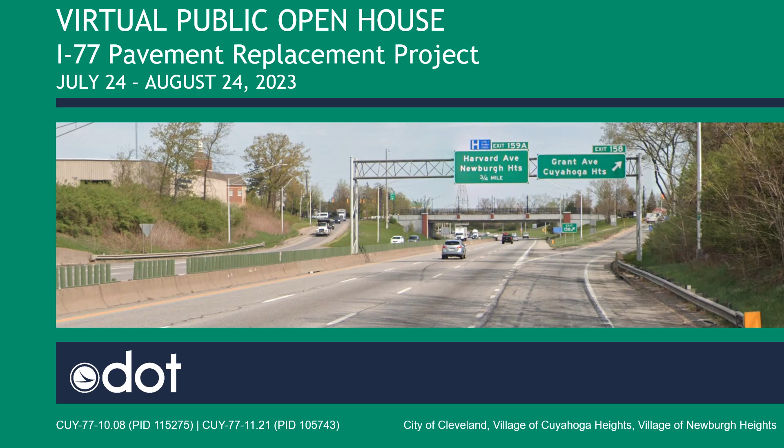Your feedback is encouraged. You're invited to review the information on this website to find out more about what is included in the I-77 pavement replacement project, the impacts it will have on the human and natural environment, and how and when it will be built.

We ask that you give us your feedback by August 24th, 2023. Comments received by this date will be formally documented and considered during the project's final design and construction phases. Responses to all the comments received will also be posted to the website after the virtual open house is over.

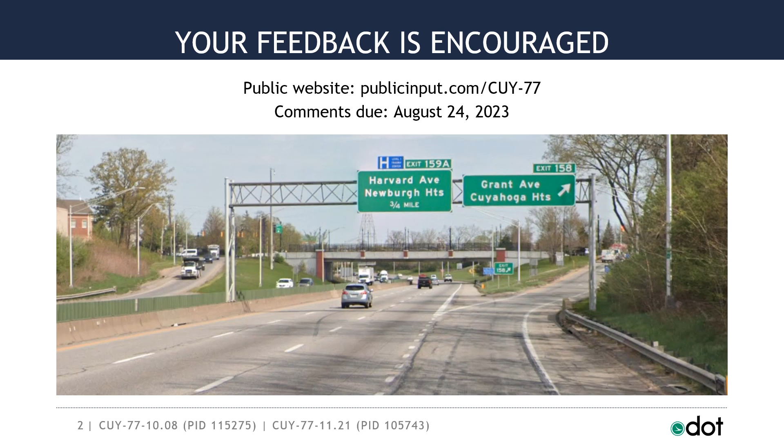The agenda. This presentation will include general information about the I-77 pavement replacement project, including why it is being built and what improvements will be made. We'll also provide an overview of how traffic will be maintained during construction and what detours you can expect while the project is being built.

In addition, we'll provide information about how ODOT is planning to address impacts to the CHARD Avenue pedestrian bridge. Information about expected environmental and property impacts, also known as right-of-way acquisition, will also be presented. We will conclude by going over the project's next steps and sharing ways that you can provide feedback about this project.

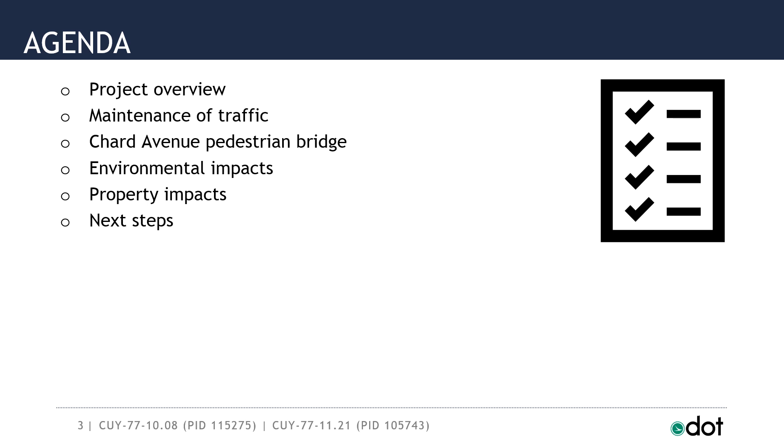Project overview. The I-77 pavement replacement project is located in Cuyahoga County and will stretch from the Canal Road overpass in the south to I-490 in the north. This 5-year project will be built in 2 different sections. The first section will take place from south of Fleet Avenue to I-490 in the city of Cleveland and the village of Newburgh Heights. The second section will take place from Canal Road overpass to south of Fleet Avenue in the villages of Cuyahoga Heights and Newburgh Heights.

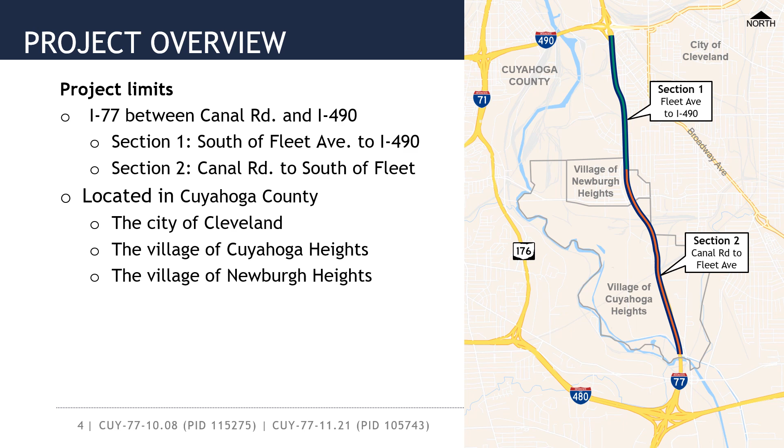The narrow median shoulders on I-77 restrict access for emergency vehicles and do not provide enough room for disabled vehicles to pull out of traffic. The narrow median shoulders limit the ability to contain water during rainstorms. Furthermore, the highway drainage system is over 60 years old and the pipes are in poor condition. The primary needs of this project include improving the drainage system and bringing the roadway up to current design standards.

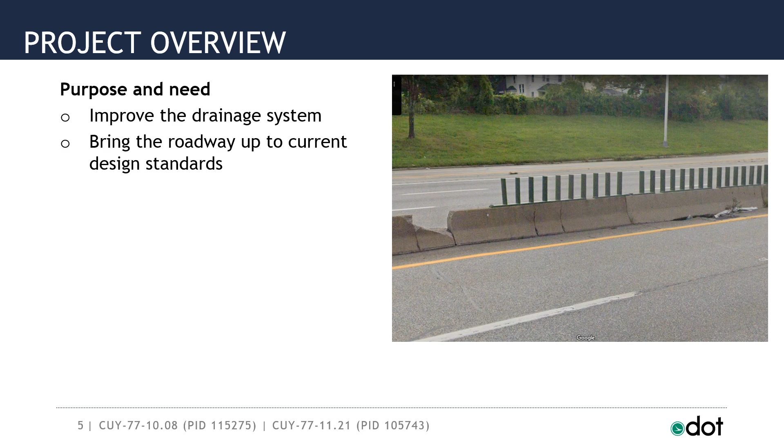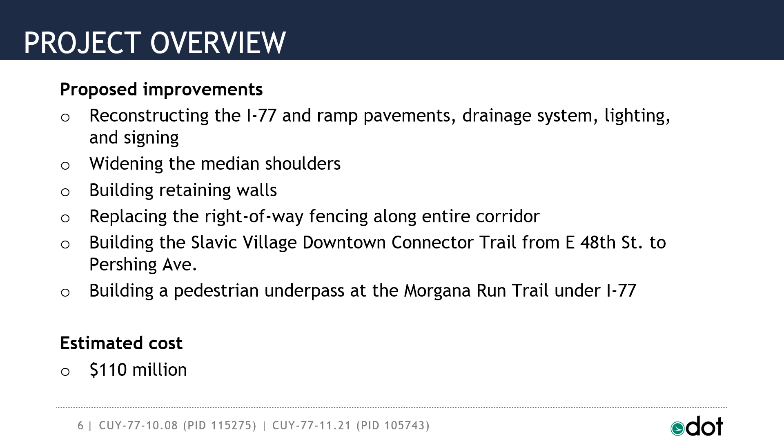The project is currently estimated to cost about $110 million and will be constructed over a 5-year period. It will include the following improvements: reconstructing the I-77 and ramp pavements, drainage systems, lighting and signing, widening the median shoulders, building retaining walls, replacing the right-of-way fencing along the entire corridor, building the Slavic Village downtown connector trail from East 48th Street to Pershing Avenue, and building a pedestrian underpass at the Morgana Run Trail under I-77.

These graphics compare what I-77 looks like today and what it will look like after the project is built. The project will not add any new lanes on I-77. When the project is done, there will still be 3 lanes in each direction on I-77. However, the median shoulders will be widened. Today, the median shoulders are only about 3 feet wide. When the project is completed, they will be 10 feet wide. This will improve safety in the corridor and will help keep traffic moving by providing additional areas for disabled vehicles to pull off the highway.

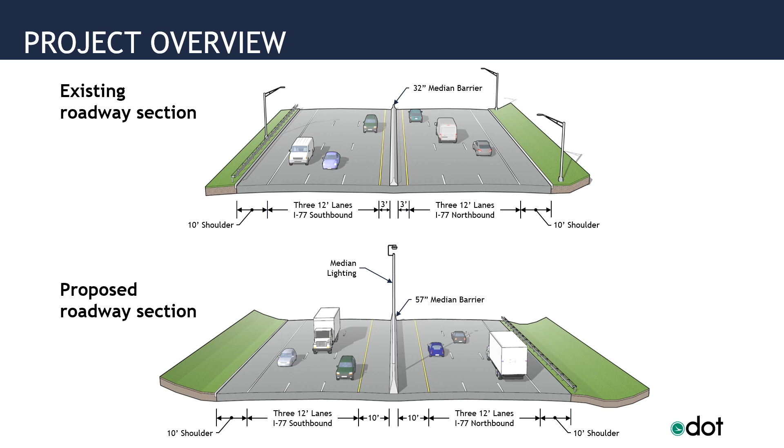As part of the project, the I-77 pavement will be completely removed and rebuilt. The highway drainage system will also be replaced, including increasing the size of the storm sewer pipes from 42 inches to 72 inches to capture water during rainstorms. The median barrier will also be completely replaced, and the new barrier will be 2 feet taller than the one that exists today. Finally, the lighting will be completely replaced. Today there are light poles on both sides of I-77. The project will include installing new light poles in the I-77 median barrier.

Maintenance of traffic. The I-77 pavement in Section 1 will be replaced first, with work anticipated to start in the summer of 2025 and likely lasting through 2027. Once the pavement work in Section 1 is complete, the pavement replacement in Section 2 will begin.

The pavement work in Section 2 is anticipated to start in the spring of 2028 and last through 2029. The final pavement surface and other finish work should be completed in the spring of 2030. Work occurring off the highway, such as construction of retaining walls, drainage work, and others, may be constructed concurrently in both sections.

Throughout construction, 3 lanes will be maintained in each direction during peak travel times, although some lane closures may occur during off-peak times, and some full closures of I-77 may occur on weekends. In addition, ramps will be closed and detoured on a short-term basis. The public will be notified in advance of any planned full closures and detours during construction.

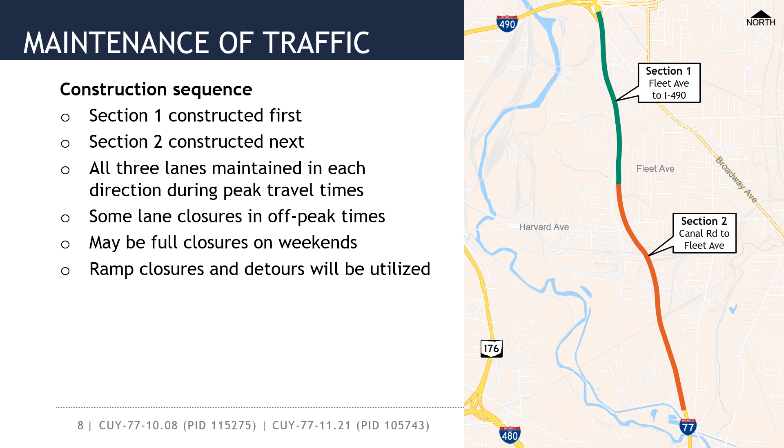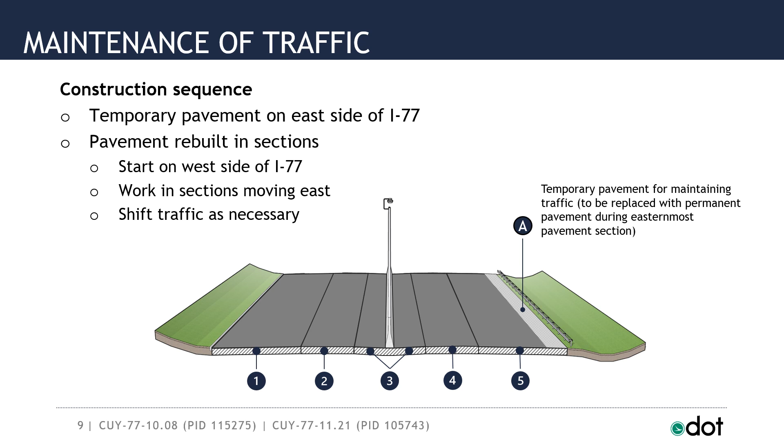Project construction will last about 5 years. During that time, individual ramps will be closed and detoured to protect public safety during the construction on the ramps and to allow the project to be built faster. When needed, ramps will be closed and detoured for a maximum of 30 days.

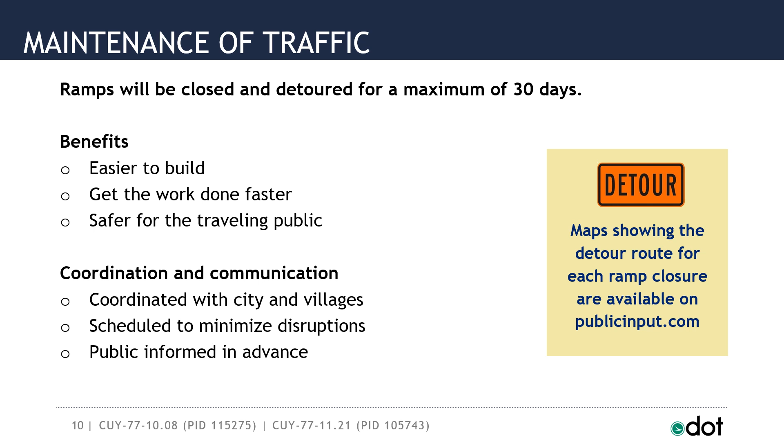Details about the detour routes have been coordinated with the affected municipalities, and ODOT will continue to coordinate the closures to make sure that the detour routes do not conflict with other ramp closures. Finally, the public will be notified in advance of any planned ramp closures or detours. Construction is anticipated to start in July of 2025 and end in June of 2030.

Work by other contractors will also be occurring concurrent with the I-77 pavement replacement work. Work being completed by the Northeast Ohio Regional Sewer District will overlap with the project's construction and will have separate traffic restrictions on some ramps and local roads.

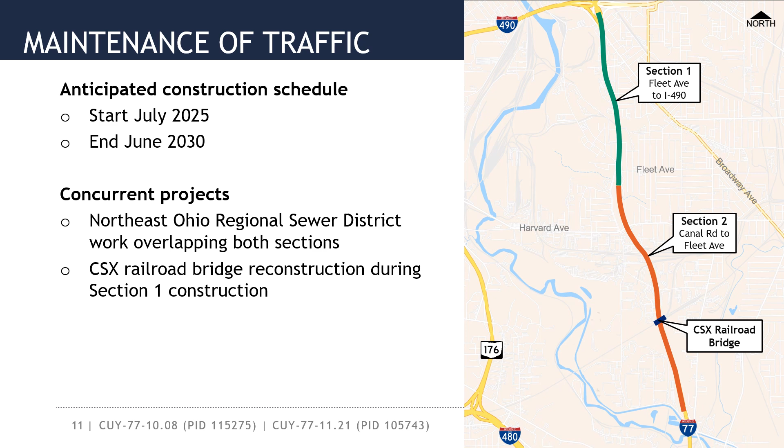An overhead CSX railroad bridge that is located within the limits of Section 2 will be reconstructed as part of a separate project that will occur while Section 1 is being built. ODOT will coordinate the I-77 pavement replacement project with other projects in the area to minimize disruptions to the traveling public. The CHARD Avenue Pedestrian Bridge.

The CHARD Avenue Pedestrian Bridge is located about a quarter-mile north of Fleet Avenue. The median shoulders on I-77 cannot be widened without impacting the pedestrian bridge piers. Furthermore, the location of the existing piers would constrain maintenance of traffic operations, which could result in heavy traffic congestion and backups on I-77 during construction.

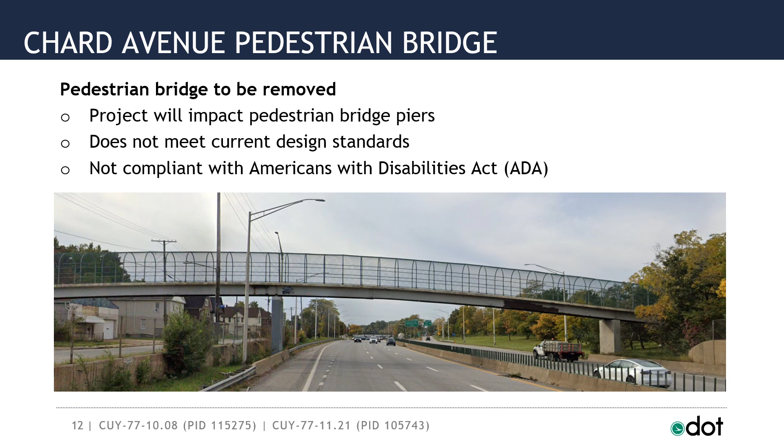The bridge is only 7.5 feet wide, which limits two-way use by pedestrians and bicyclists. The bridge is also too low and does not provide the required vertical clearance over I-77. In addition, the pedestrian bridge does not comply with the requirements of the Americans with Disabilities Act and has too steep of ramps leading up to each side of the bridge. Because of these factors, the CHARD Avenue pedestrian bridge will be removed as part of this project.

A survey for people who use the CHARD Avenue pedestrian bridge was conducted from February to May of 2021, and the project team coordinated with the City of Cleveland, Slavic Village Development Corporation, and Cleveland Metroparks to evaluate options for a new pedestrian and bicycle crossing of I-77.

As a result of those activities, ODOT is proposing to replace the existing I-77 bridge over the former Wheeling and Lake Erie Railroad with a pedestrian underpass and connect the Morgana Run Trail under I-77. The rebuilt underpass will be lighted to promote safety and security for pedestrians and bicyclists.

In addition, the project will build portions of the planned Slavic Village Downtown Connector Trail from East 48th to Pershing Avenue. The Morgana Run Trail connection and the portions of the Downtown Connector Trail will provide a new protected crossing about a quarter-mile north to replace the CHARD Avenue pedestrian bridge and will restore cross-interstate access to, from, and between the neighborhoods surrounding the pedestrian bridge.

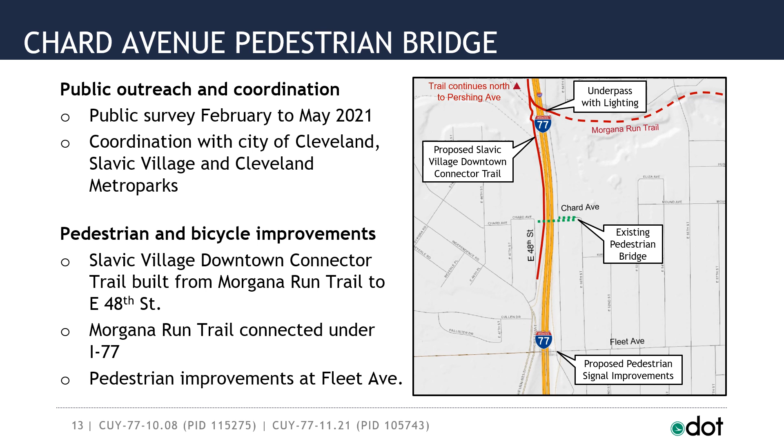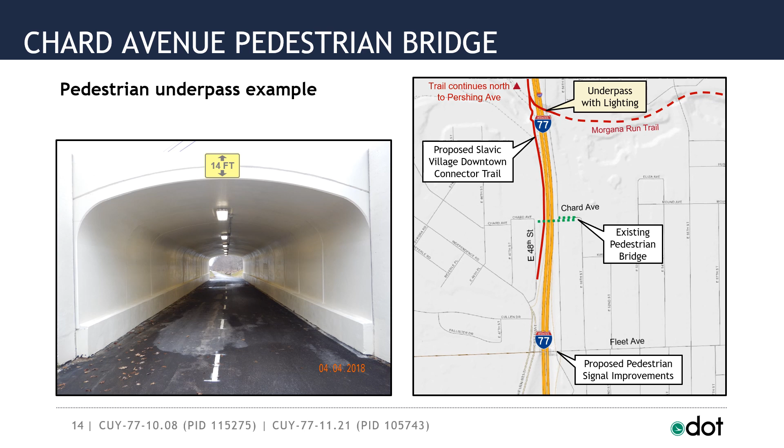Here's an example of what the Morgana Run Trail underpass might look like. It will be about 140 feet long and 20 feet wide and provide about 14 feet of clearance over the multi-use trail. Security lighting will be provided in the underpass and under the adjacent East 49th Street Bridge, which will remain in place.

Environmental impacts. The City of Cleveland and ODOT have a responsibility to comply with the National Environmental Policy Act and other laws and regulations. With this in mind, the proposed project was evaluated to determine its potential effect to resources such as public recreational facilities, floodplains, waterways, threatened and endangered species, and historic properties.

After an initial review, the project will temporarily impact the Morgana Run Trail, where the pavement for the new trail underpass connects to the existing trail. However, access to the Morgana Run Trail will be maintained at all times, and no permanent impacts will occur. There will be minor fill constructed in floodplains near Burke Brook, but there will not be a substantial change in the flood elevations. This work was reviewed and approved by the local floodplain coordinator.

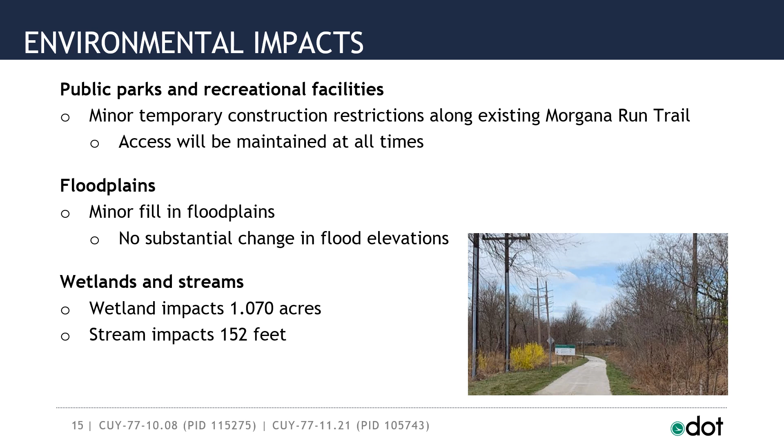A little over 1 acre of wetland impacts and 150 feet of stream impacts are expected due to regrading along the highway and fence replacement activities. Tree removal in the project area will only occur during certain times of the year to avoid impacts to threatened or endangered bats. The project will not impact historic properties.

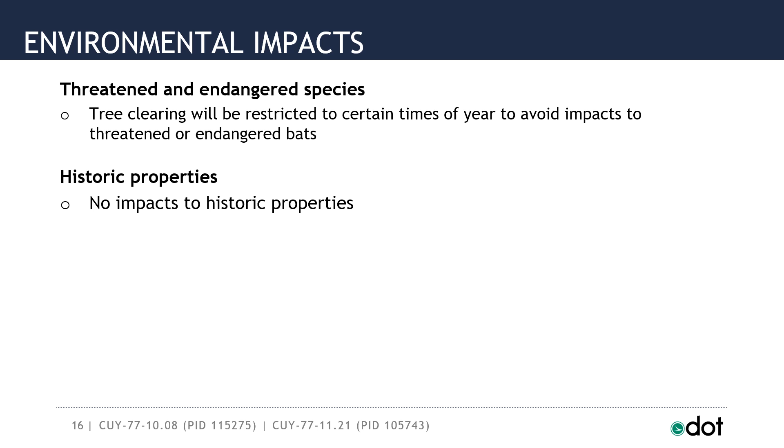Property impacts. The land that is owned by the state of Ohio for public roads is called right-of-way. The project will require about 2.6 acres of right-of-way from adjacent property owners to build the highway. About 0.9 acres will be purchased from 3 private property owners, and about 1.7 acres of land owned by the state of Ohio will be converted to roadway right-of-way.

1 parcel will be completely acquired, and ODOT will acquire a strip of right-of-way from the remaining parcels. No homes or businesses will need to be relocated as a result of the I-77 pavement replacement project. In addition, ODOT will require about 3 acres of right-of-way on a temporary basis while the project is being built. This is called temporary easement.

The purchase of private property is regulated by the Uniform Relocation Assistance and Real Property Acquisition Policies Act of 1970 as amended, and ODOT will follow all state and federal requirements when acquiring property. Right-of-way acquisition is set to begin in March of 2024, with all properties to be acquired by February of 2025.

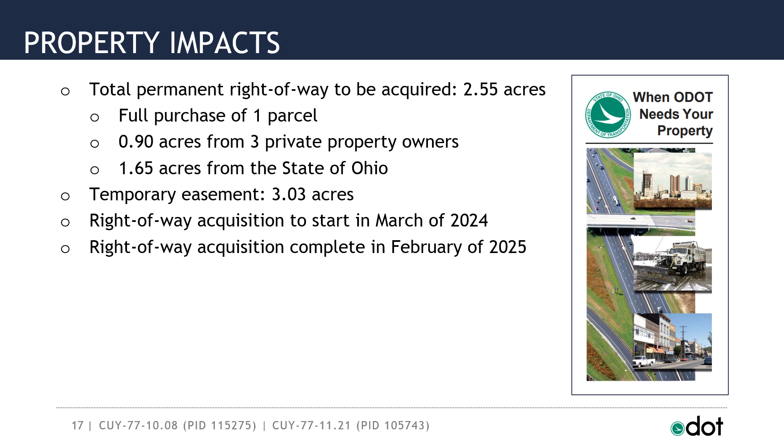Next steps. The project is currently in design phase, which is scheduled to be complete by December 2024. ODOT will begin buying the property needed to build the project in March of 2024 and will complete that process by February 2025. Construction is scheduled to begin in July 2025 and be complete in June 2030.

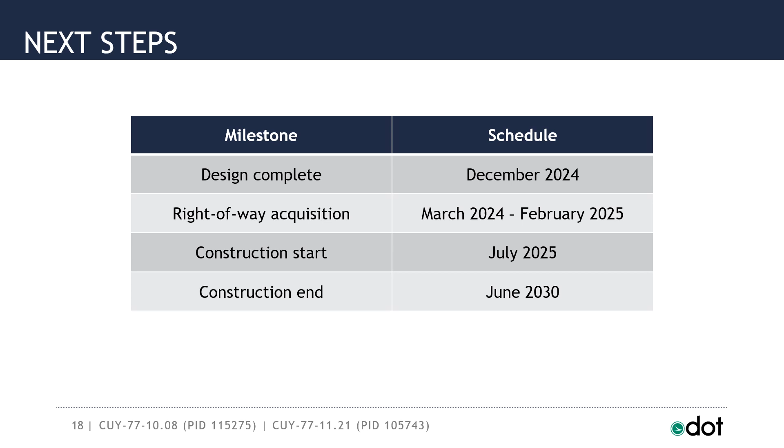Thank you for your interest in the I-77 pavement reconstruction project. Feedback about this project is welcomed and encouraged. There are several ways to submit comments. The preferred method is to fill out the comment form on this project website, but all comments will be considered no matter how they are submitted. Take a moment and note your options for submitting comments. ODOT will prepare responses to the comments received and will post a summary on this website when the virtual open house has concluded. We look forward to hearing from you.